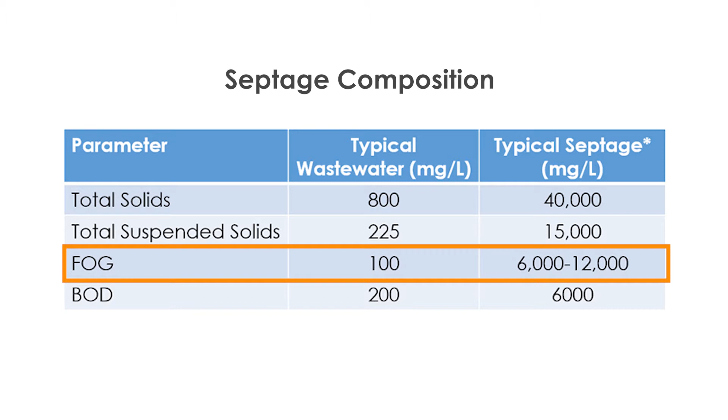Looking more deeply at septage composition, the total solids can be as much as 50 times greater than typical wastewater. The total suspended solids can be as much as 50 times greater or more than typical wastewater. The fats, oils, and grease content can also be greater, as much as 100 times, and the nutrient level can be as great as 30 times more than typical wastewater.

I'd like to cover challenges with septage receiving. The composition is variable in terms of rags, fats, oils, and grease, and solids type and composition. When a hauler truck unloads at a site, the initial flow is by gravity from the tanker, creating high flow across the screening system that can have high solids and potentially blind the screen. As the tanker empties, flow and velocity drop, and low velocity can let grit drop into the septage receiving system. Rocks are also contained in these systems, coming from pump outs of lift stations that contain grit and rocks in collection systems. Those heavy objects can impact septage receipt.

Tanker unload speed is required. When a hauler truck pulls up to a site, they generally want to unload the contents of the tanker and then get back out of the treatment facility. So screening speed and compaction speed are important in the process.

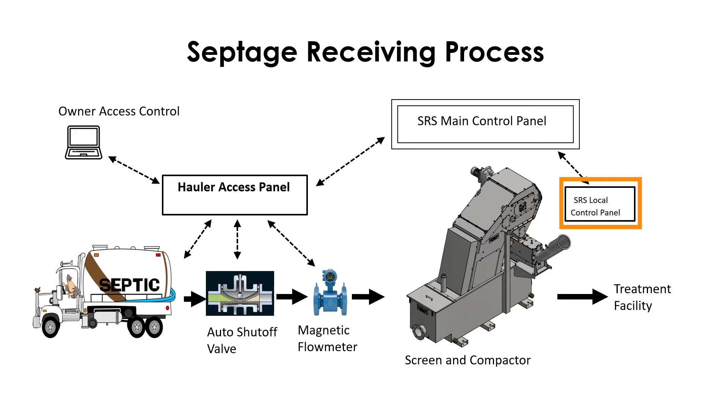There is also software connected to the hauler access system that can allow billing to happen. The next part of the process is the screening and compaction system, which is connected to a main control panel such that the waste is screened and solids are removed and compacted from the system. There can also be a local control component for the screen and compactor, as those can be located indoors in a hazardous area.

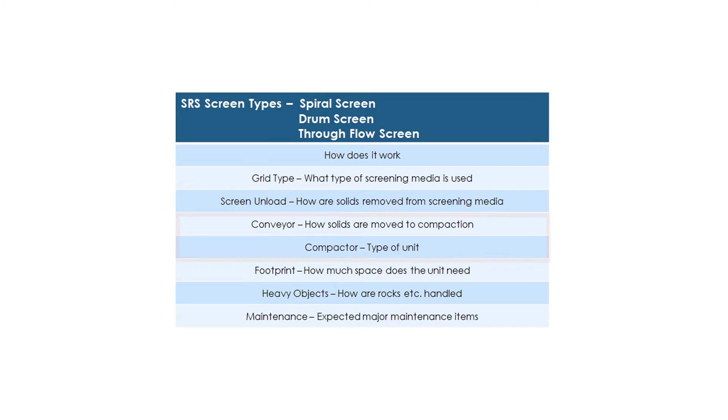I'd like to cover the technologies present for screening, as screening is the heart of a septage receiving system. So we're going to cover different screens: spiral, a drum screen, and a through flow screen. And we're going to look at things like how they work, what their grid types are, what are the screen unloading methods, if there's a conveyor or compactor present, what are the footprints available for each, are heavy objects addressed in each design, and what are general maintenance requirements.

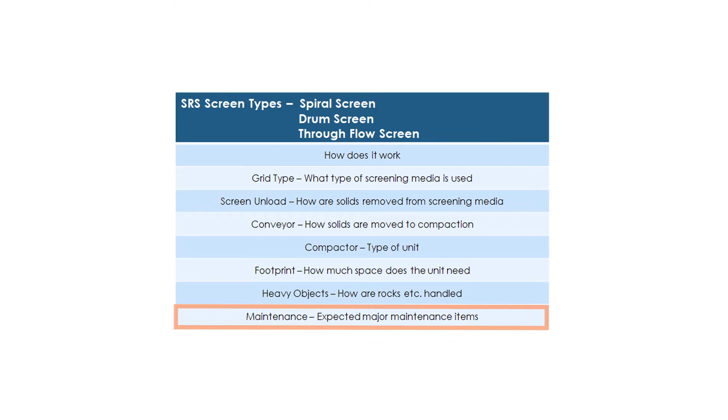Now, these aren't all the designs available. I'm covering the main technologies that are used for septage receiving.

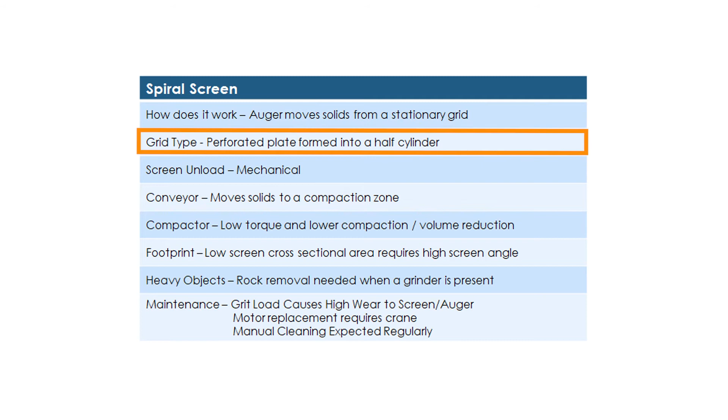The first screening technology I'd like to cover is a spiral screen. The spiral screen utilizes an auger against a stationary plate. The auger is used to convey solids and clean the perforated plate and convey those solids into a compaction zone. The grid type here is a stationary, circular, perforated plate.

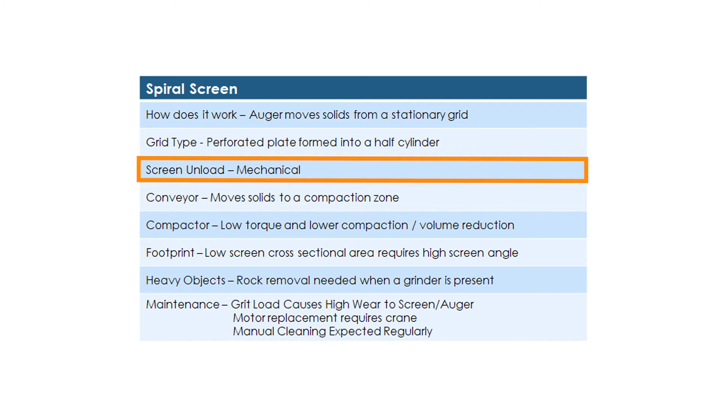The screen unload method is the auger, and the auger is used with a brush to unload the screen. The footprint is generally higher as the screen sits at a high angle and requires more space. There generally is need for heavy object removal as part of a spiral screening system.

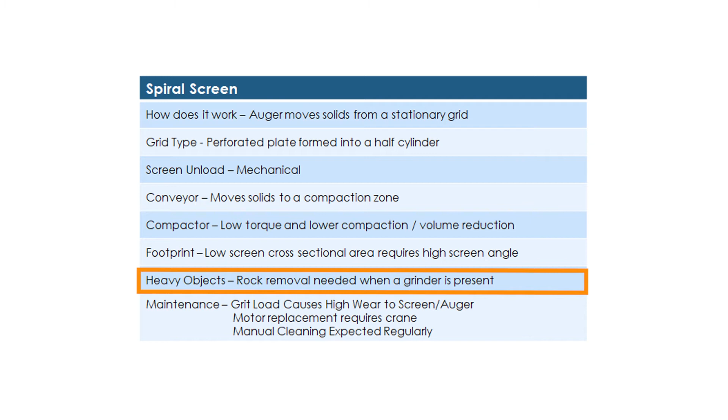And I'd like to cover the maintenance requirements. The grit load can cause high wear on the stationary grid. Motor replacement generally requires a crane or a platform as the motor sits higher than 6 feet. And manual cleaning is generally required on these types of grids over time.

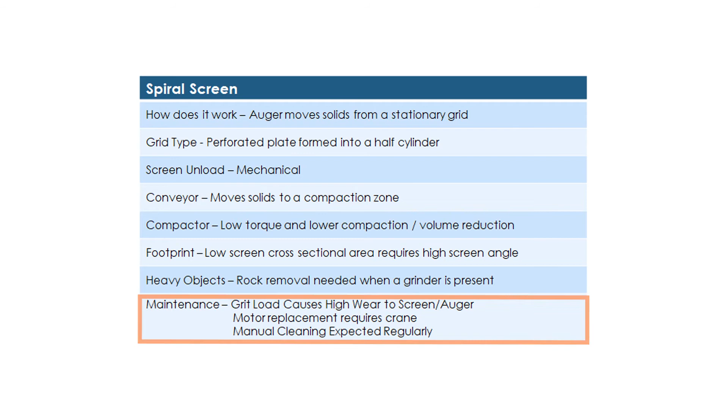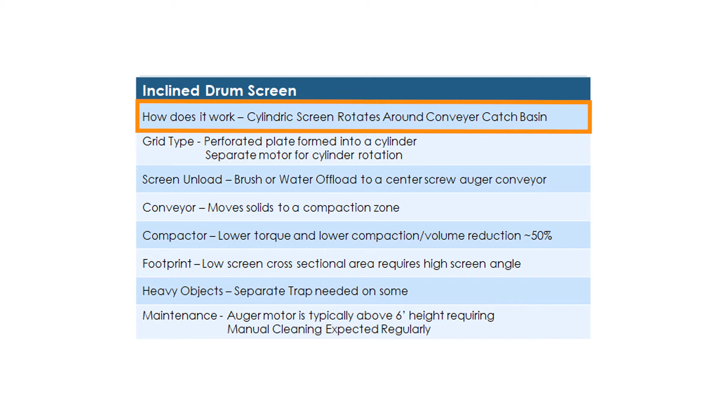The next screening technology that I'd like to talk about is an inclined drum screen. As the name connotates, it utilizes a cylindric drum that rotates. And as it rotates, there's a catch basin mounted in the center to catch screenings, and then there is a conveyor located within that catch basin to move those screenings to a compactor.

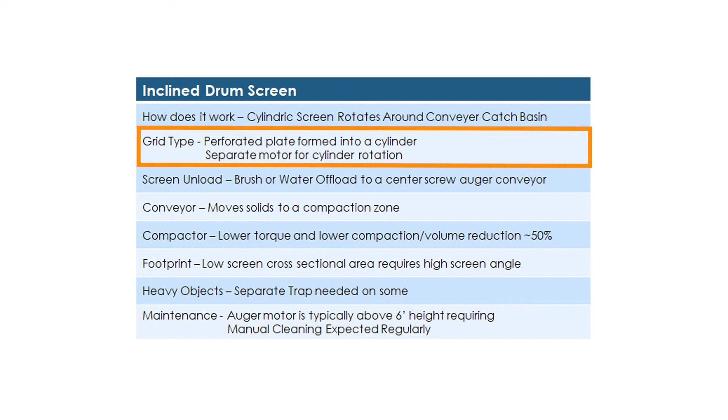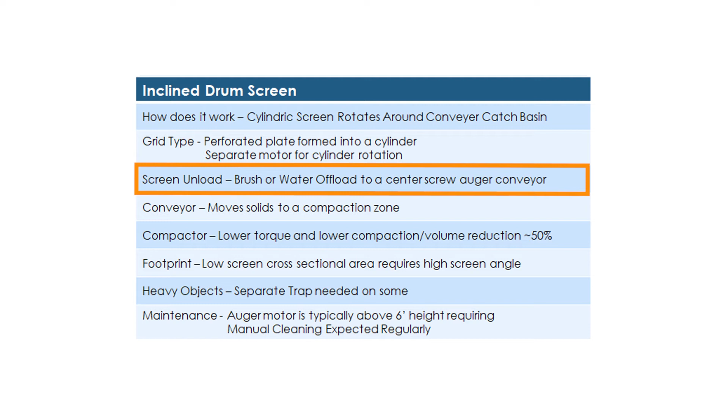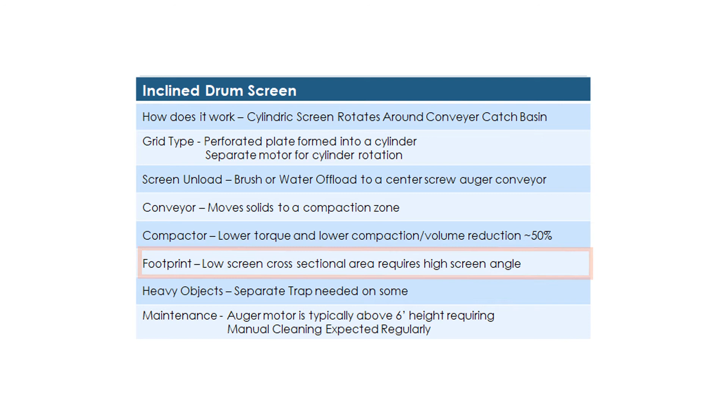So the grid type here is generally a perforated plate formed into a cylinder. There can be a separate motor needed on the cylinder for rotation, and then a separate motor for the conveyor compactor section. The screen is unloaded typically with a brush or water offload into a center screw, which is the conveyor compactor section. The footprint on these types of screens is generally smaller as the screen sits at a high angle. These screens can operate with heavy object removal in front of the screen.

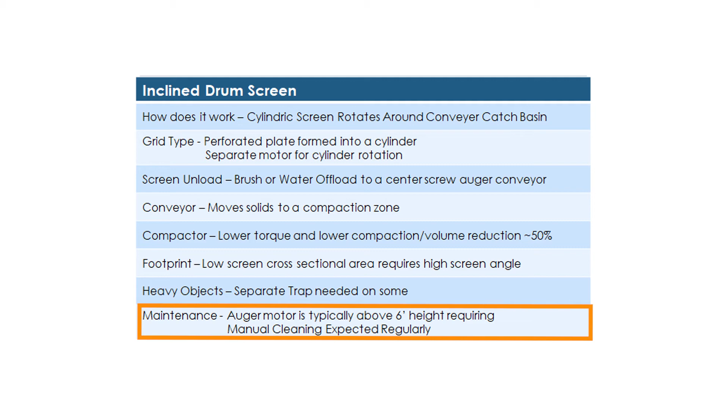And I like to cover the maintenance requirements. An auger motor is typically at higher elevations in these designs and can generally require a crane or a platform. And manual cleaning is expected on some basis, but less so than the spiral screens.

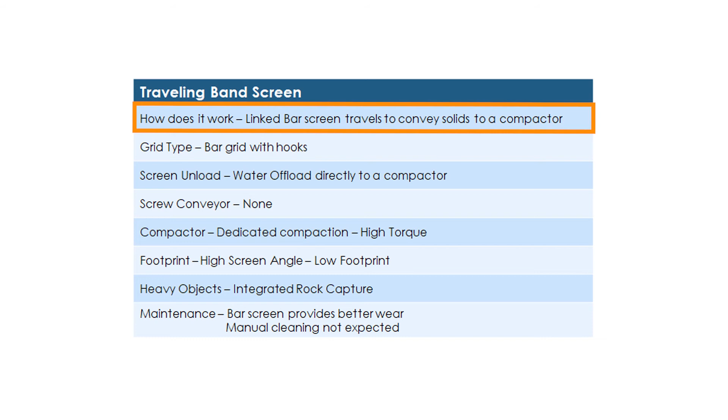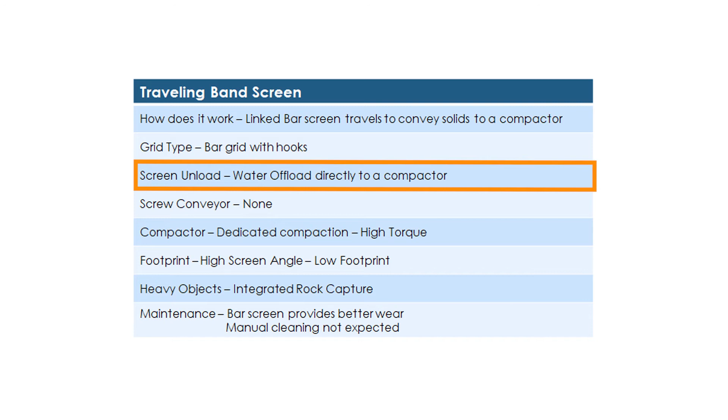The third type of screen I'd like to cover for septage receiving technologies is the traveling band screen. It utilizes a linked bar grid of stainless steel bars to convey solids to a compactor. These systems are generally offloaded by water directly into a compactor, with no screw conveyor.

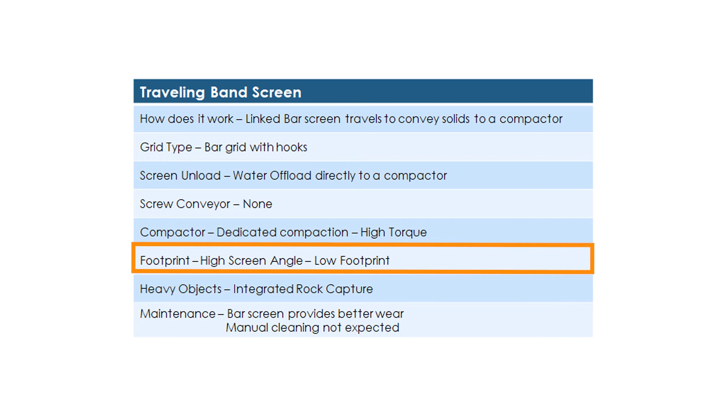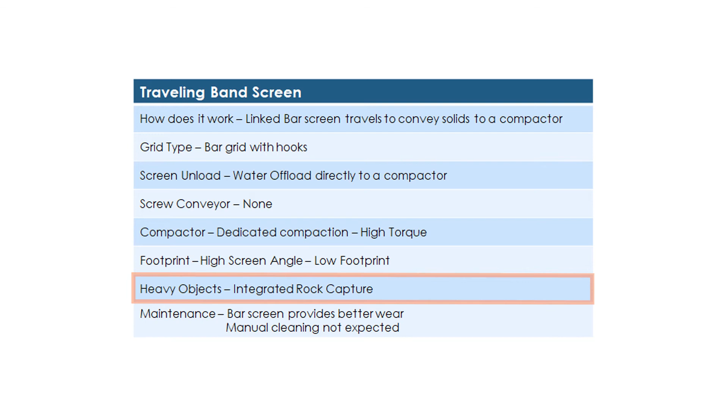The footprint here is generally lower as the screen sits at a higher angle. These systems generally do not require heavy object removal before the screening system. In terms of maintenance, the bar screen can hold up better against heavy objects and grit load, and manual cleaning is not expected for this type of screening technology.

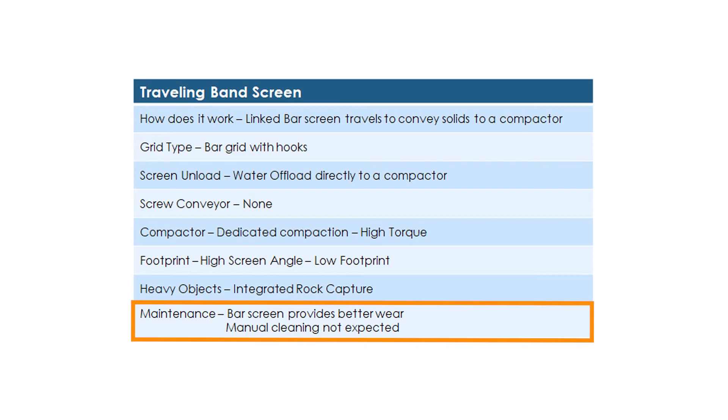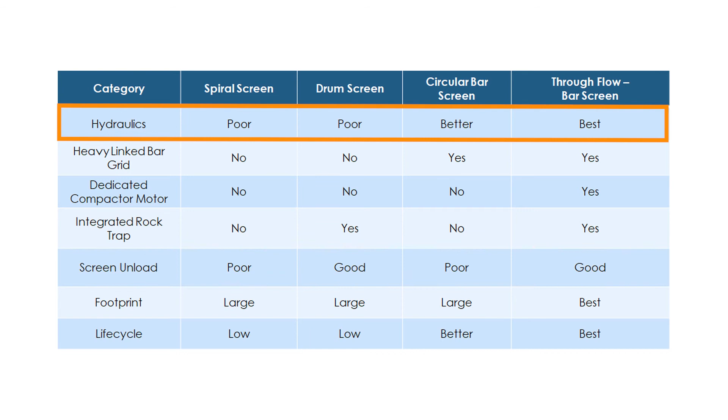I'd like to briefly cover technologies available for screening in septage receiving systems. Looking at categories like hydraulics, bar screens generally tend to perform better at the high flow and low flow conditions that can occur in septage receiving. The bar grids hold up well against the high grit and heavy objects that can be present.

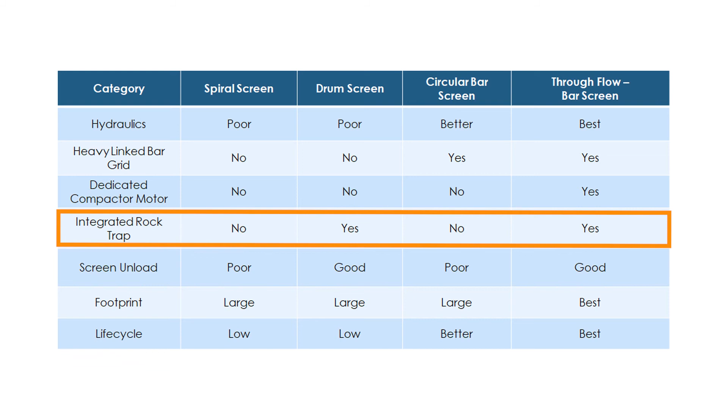One nice feature is a dedicated compactor motor. In that way, the compactor can be built in a more heavy fashion to last longer. Some designs do not require separate rock traps, as the rock trap can be integrated into the drum screen design and the through-flow design.

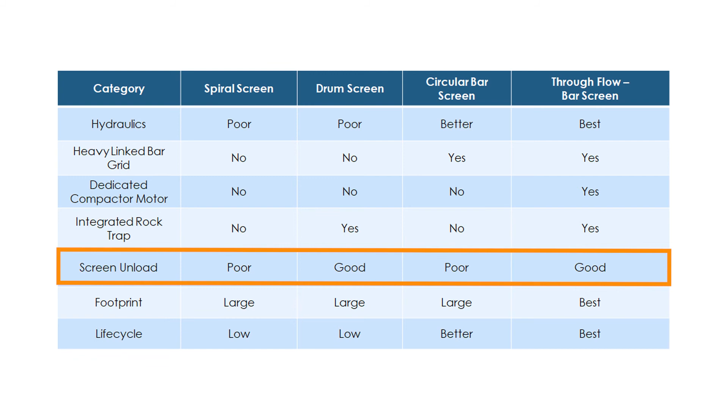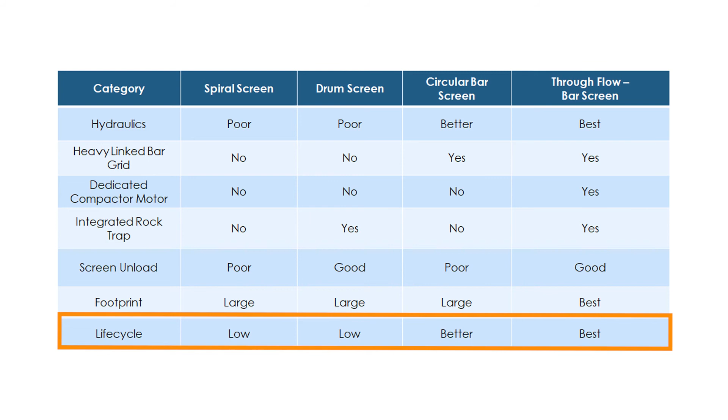Screen unload methods are important. The drum screen and through-flow designs utilize water to clean and unload the screening system. The small footprint is generally best in the through-flow design, as its screening angle is highest. And looking at life cycle costs, the bar-type grids hold up better over time and require less maintenance. I'd like to talk more about that on the next slide.

I'd like to cover life cycle cost. Life cycle cost amounts to the total cost of ownership, and it's a good method to evaluate a septage receiving system. Life cycle cost generally includes a capital cost and an O&M cost over a time period, and generally that time period is long, ranging from 10 to 20 years.

The annual maintenance cost can include things like inspection, unit cleaning, rock removal, gear oil change, and any other maintenance items present in the system. Replacement parts and labor cost includes things like motor replacement, brush and rake replacement, and any chains or grid sections that have to be replaced. These two O&M items are annualized and added to the capital to come up with a total life cycle cost, which is then used to evaluate the septage receiving process.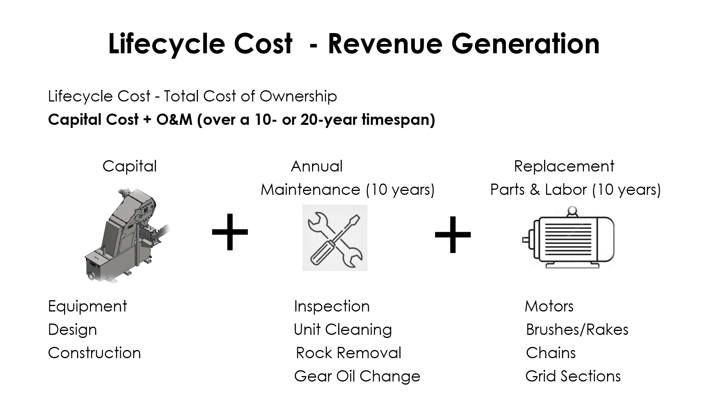I'd like to summarize some of the major points. Septage waste is much tougher to treat than typical wastewater. We talked about the solids content and rag content that can be much higher than a typical wastewater stream, and that can blind the screening system that is the base of a septage receiving system.

Some other key points include the ability to offload the most septage trucks with the least downtime, reducing any O&M labor needed to keep the system up. We want a system that can operate automatically with very little intervention, and good equipment life as part of a septage receiving station, requiring very little maintenance over a long period of time. Ultimately what we're trying to do is maximize the revenue to a wastewater treatment plant as they receive septage loads.

That ultimately maximizes hauler profits, allowing them to unload many trucks quickly without manual intervention so they can be on the road bringing back more liquid waste to a treatment plant. That ultimately leads to happy waste haulers, happy customers.